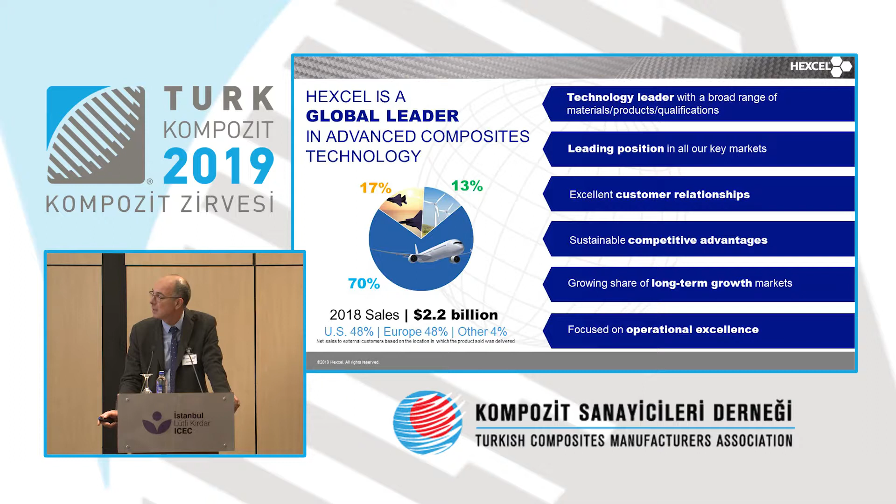So the first 3 slides will be a very short introduction to Hexcel. Hexcel is a global leader in advanced composite technology for commercial aerospace, defense and space and industrial application. As you can see on the slide, this represents 70% in the case of commercial aerospace, 17% for the military defense, and 13% in the case of industrial.

So today, what we are offering to the industry is the fact that we are really integrated. We offer a solution at all stages of the composite chain, from carbon fiber to fiber and fabrics, glass, carbon, aramid, to resin formulation for thermosetting and soon thermoplastic prepregs, laminates and pultruded elements. Molding material, composite tooling, honeycomb and adhesives are also in complement to our range, and we're also making it. So we are really a unique solution provider for that part of the industry.

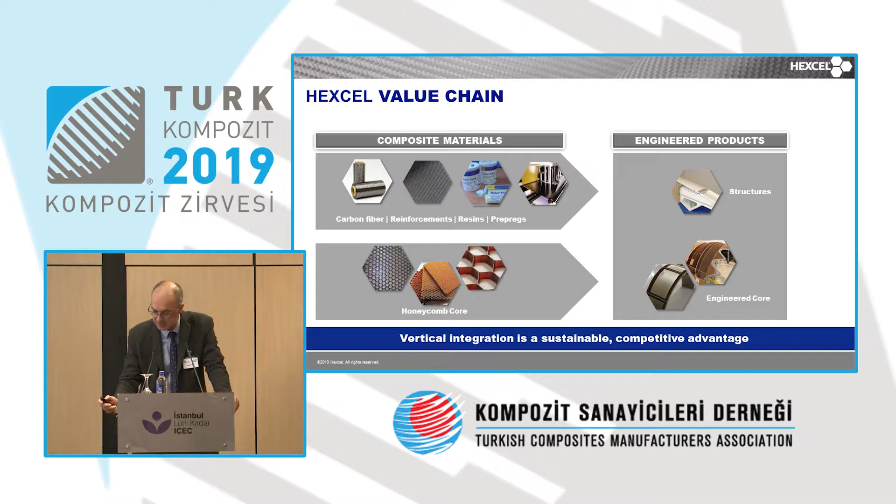We also produce structural parts, as can be seen here, which we call engineered core, particularly for aerospace. The industrial business focuses on 3 main areas. First of all, wind energy. The second is automotive. And the third one being what we call other specialty area, with 2 main focus today on sports and leisure and marine applications.

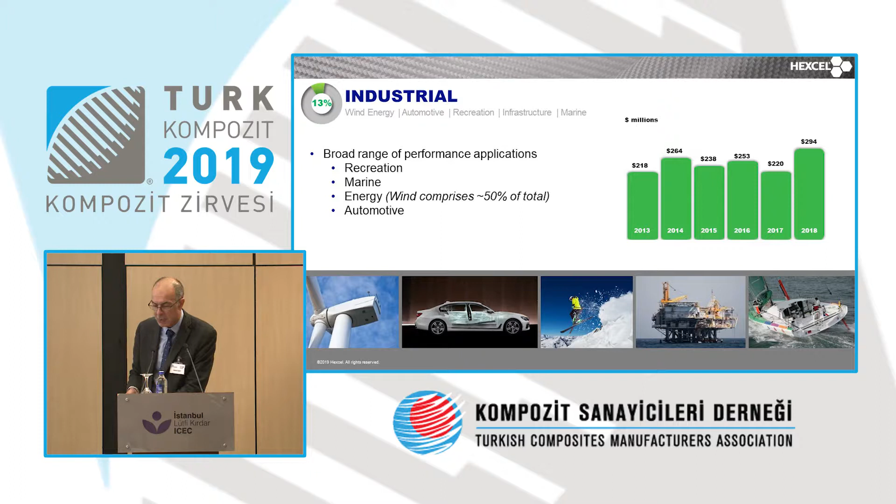As we can see, there is a big trend in the industry, of course, for lightweighting. And in the case of wind blades becoming bigger and bigger, this is also the case. Car designers are also looking at driving down the CO2 emission. So really lightweighting is a priority, and we are really pushing our engineers to develop more and more of these lightweight products.

If we look first into, I would say, the primary block for the carbon fiber composite, this is really what we call in our range the HexTow carbon fibers. And here is summarized the entire range of our products. We are one of the only companies to be integrated also in the monomer and the polyacrylonitrile precursor made both in the USA and also in France, close to Lyon, most recently.

Here, of particular interest, there are, I would say, 3 families: high strength, intermediate modulus, and high modulus. The high strength, the most used in the industrial world would be the AS4C, which is a fiber available in 3, 6, and 12K for sports and leisure, but also very much recognized for OEMs in carbon look parts in the automotive applications. The IM2C is also becoming more and more recognized in sports and leisure, and particularly for racing boats, as it is today the highest intermediate modulus fiber approved for IMOCA and America's Cup racing boats. You can build foils, structural parts out of it, and all the parts that are going into this kind of beautiful boats.

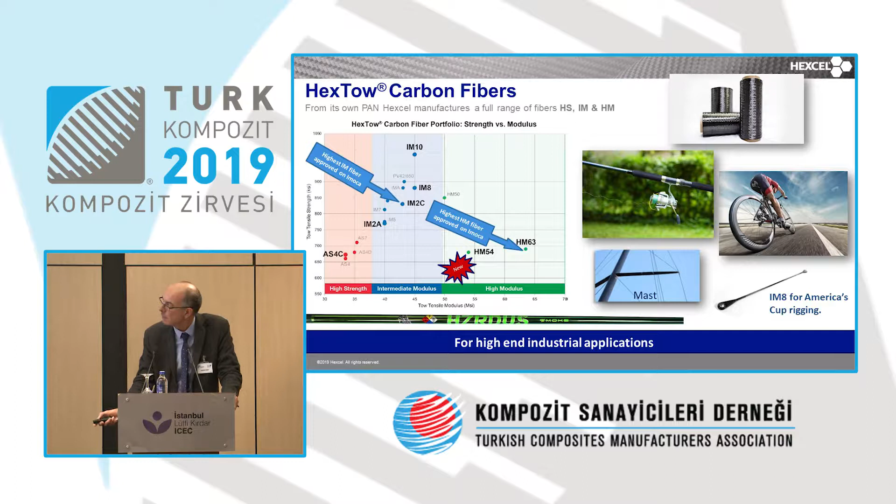Let's go now into the first family of reinforcement that we are proposing to the composite industry, which is the multi-axial product family called HiMax. Multi-axial are also known as non-crimp fabric because they are layers of unidirectional fiber that are assembled and stitched together in the following pattern, as you can see on the bottom here. And of course, they will provide strength and stiffness in multiple directions, something that normally your woven fabrics will not do the same way, particularly in the 45 direction.

Depending, of course, on the orientation of the fiber, you can really take the stresses in different directions. We've got unidirectional, biaxials, triaxial, and quadriaxials, and really going into marine infrastructure and automotive applications. The interesting thing about the non-crimp concept is that it is giving in-plane mechanical properties. There is less material waste and the layup time is reduced, of course, when you use thicker and thicker material, like in the case of building up really big structures. One interesting thing as well, we offer different compatibility depending on the resin that is used, epoxy, vinyl ester, or polyester, or in certain cases even multi-compatibility.

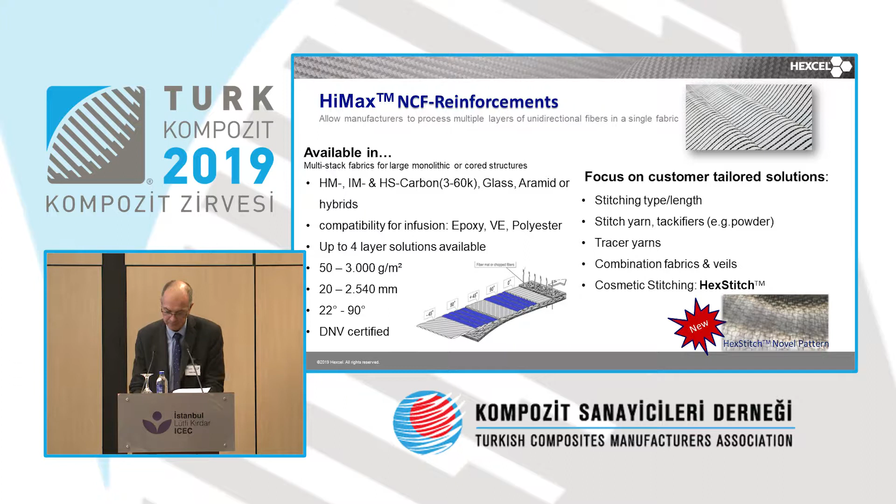It is quite interesting as well with multi-axial to offer a multiple way of tailored proposition. For example, we've got a micro mesh that will help the infusion control. This is a thermoplastic mesh that is assembled with the NCF. Another way to enhance infusion is to use what we call weft insertion into our UD fabrics. And this is what we call UDWI HiMax infusion fabrics.

And last but not least, this is something that can appear in certain cases when you are using those fabrics: the fabric will appear and we will call it print through. And in order to avoid that, we've got a solution by offering some layers of fabric that will avoid the print through during the infusion process. This is also quite important in certain parts of the industry.

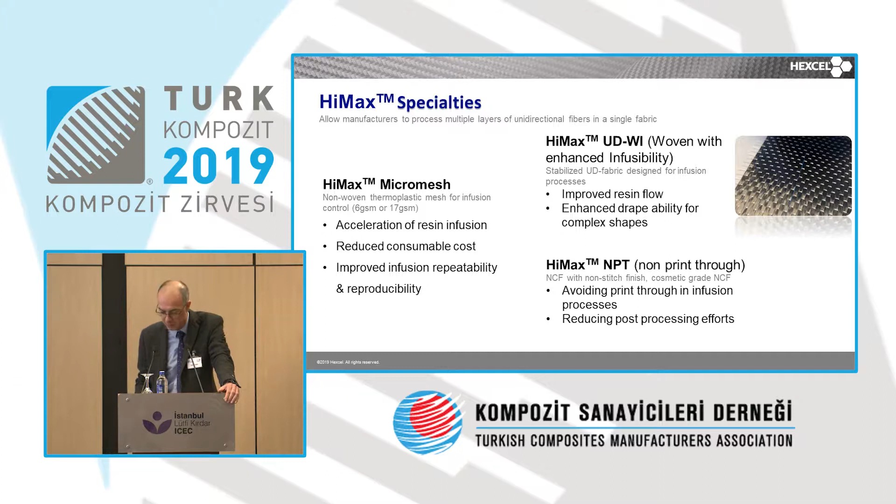Another featured and quite specific option that we are offering is a very heavy trend today, which is something we're presenting on our booth. It's what we call the dot pattern adhesive material, which is effectively a pre-tacked NCF, which is pre-tacked with some bonding material in order to help molding and

applying to the mold. Of course, one of the main advantages is that it does not need any tackifier, no spray, and it can be applied directly onto the mold.

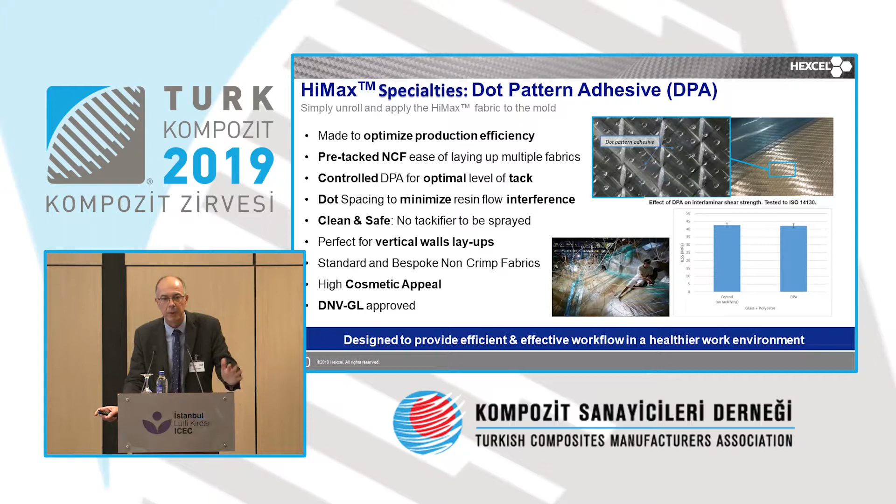So we've got two versions of it, depending on the weight of the fabric. If the fabric is going to be more on the carbon or weight below 600 grams, 700 grams, it will be 3 grams bonding, and then we can vary and go up to 8 grams bonding. That will also help for heavier fabric.

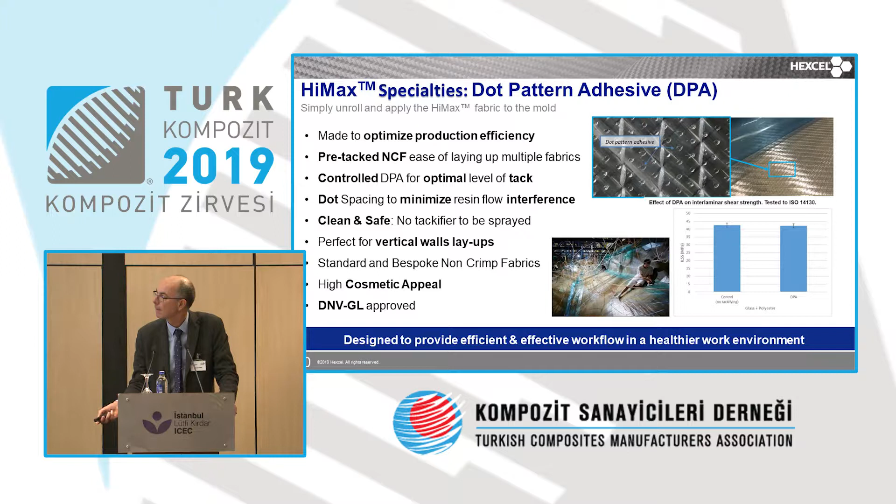So we've developed some of this technology with some of our customers, and particularly here, the company Sunseeker, who has developed that for one of their latest boats, the Predator 50, that is represented here.

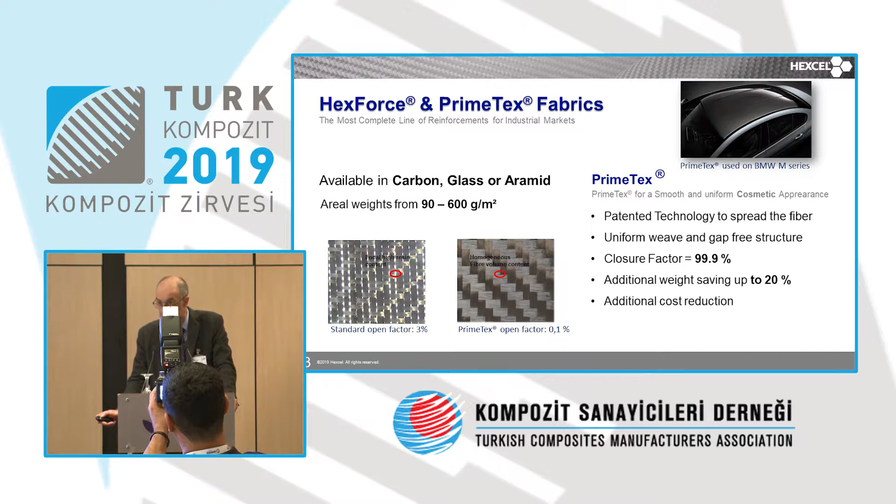If we go to the next part of the product, this is also reinforcement. This is more a traditional way of weaving. Of course, this is warp and weft type of fabrics. And today, we are one of the leaders in woven reinforcement for composites, particularly our carbon fabric plant in France is considered one of the biggest in terms of capacity.

Here we have a full range of fabric. I will not go into those details. We of course propose all the main plain weave, twill weave, and satin weave. But one thing I will just stop on for a few minutes is the Primetex range of fabrics. In that particular case, we have closed weave and uniform cosmetic appearance.

The filaments of each tow are spread out, so that it can actually reach a closure factor of close to 100%. An interesting thing about that technology is that it enables to go lower in weight, down to, for example, 98 grams for a 3K, where normally you would be using 1K material. So that's really something that enables good cosmetic appearance, but also cost saving and weight reduction.

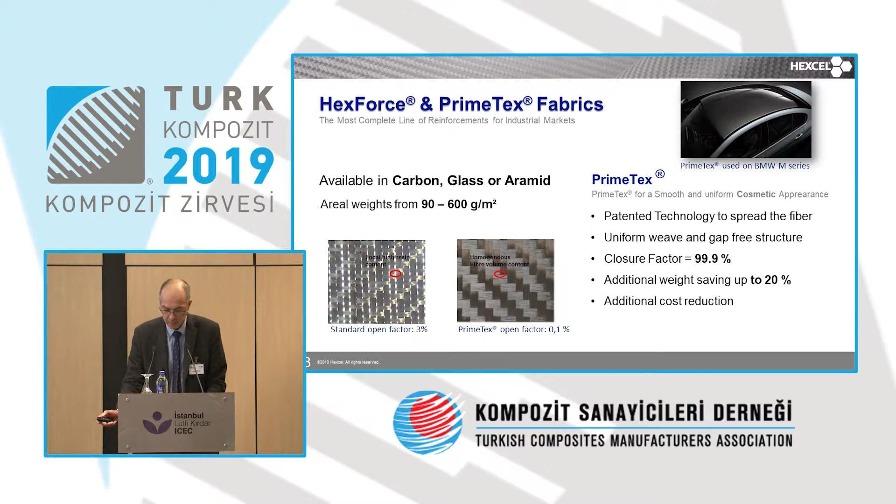Something also that we are introducing to the industrial companies only recently, because that material was originally developed and designed to meet the requirements of the aircraft industry structures by cost-effective out-of-autoclave technology, such as vacuum infusion or injection. Now we're promoting it for selected applications in industrial as well.

The HiTape is actually a dry, high-performance UD tape made from a whole number of carbon tows, which could be high strength, intermediate modulus, or high modulus, and stabilized by two thermoplastic veils on both sides of the tape. There is no cutting during production. The edges of the HiTape are completely clean and free of any fuzz.

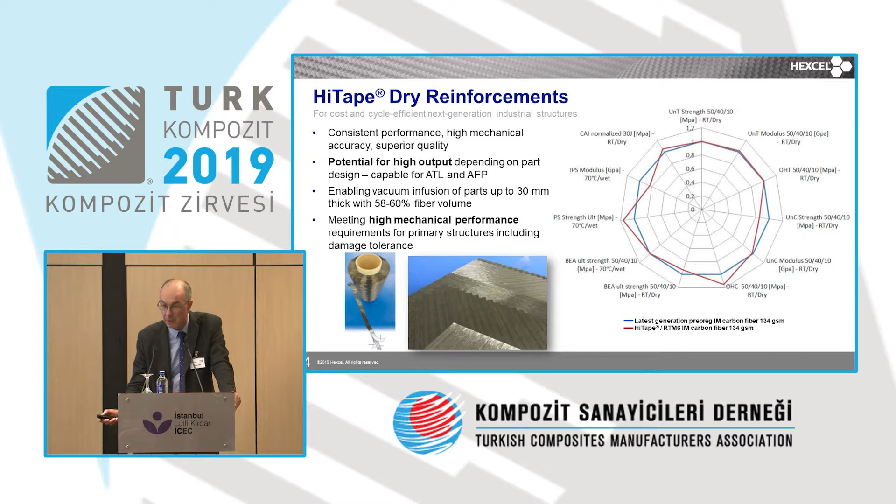This can be used with RTM resin, with best results obtained with our Hexcel RTM6, but the interesting thing there is that it is of course fully suitable for industrial fiber placement systems. So that gives really a different view on the way of applying those types of fabric. No need to cut, it's already at the right dimension.

A look at our adhesives, which some of you might have known in the past was called Redux, which is now called HexBond. Basically, three families that are being used in the case of industrial. We've got film adhesives, which are most of them epoxy-based, but we do have also BMI adhesive that supply in film forms on a roll and will be requiring heat and pressure to be cured.

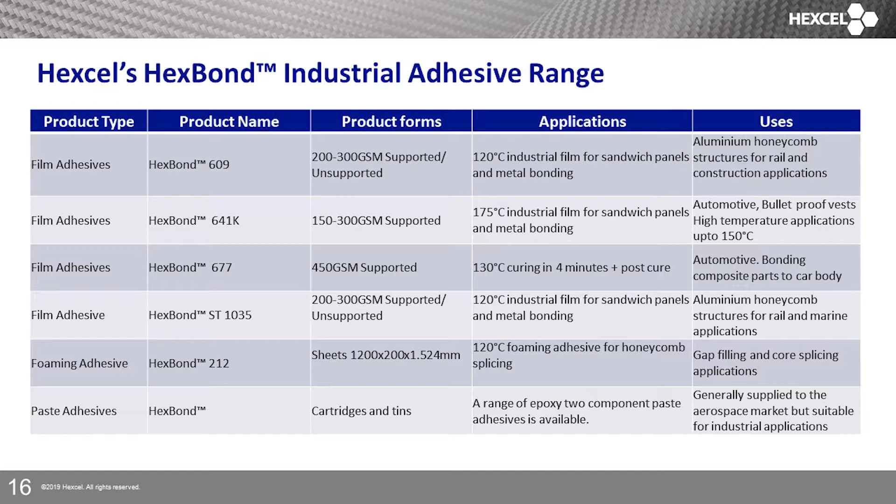So they are ideal for metal-to-metal bonding, composite bonding, and that's also something being used for the manufacture of honeycomb sandwich structure. We have also a family of foaming adhesive films. So these films will expand when cured at an elevated temperature, making them really ideal for gap filling in certain structures.

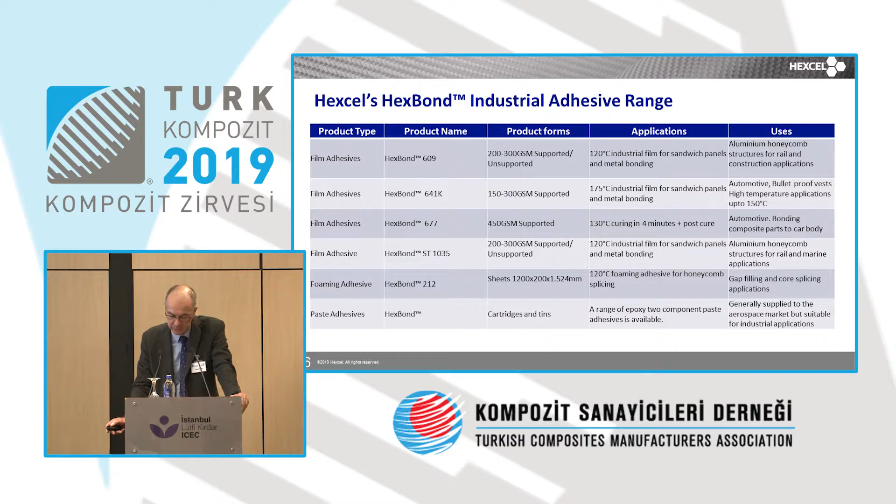And finally, the last family that is actually used in the industrial would be paste adhesive, which are either one or two components epoxy or BMI adhesive, which can be used for bonding, potting, and filling composites and metallic structures. So we've supplied them in different type of packages, cartridges, or small container.

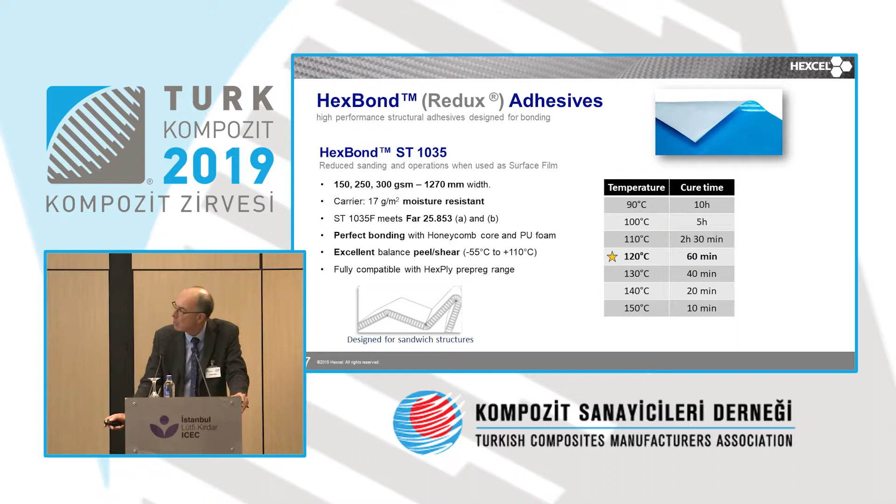The next two slides is to illustrate the sort of applications that we have. This will be in marine, also in the case of rail construction, to bond the sandwich panel that would be in those applications.

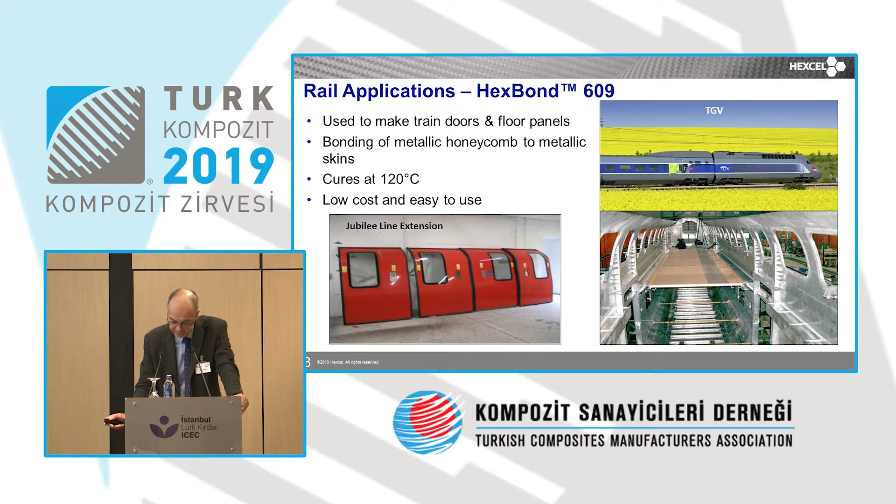Finally, but not the least, we'll have a close look at the comprehensive range of prepregs material that Hexcel is offering. So as you all know, prepreg is the ultimate composite material. It is really prepared industrially. It cures at elevated temperature, but not only, as you will see. There are some now prepregs curing at lower temperature. And this will really transform the structure in a highly durable, temperature-resistant, and exceptionally stiff material.

So we provide a number of prepregs for industrial applications, epoxy, phenolic, BMI resin matrix system. They are reinforced with woven, multi-axial, UD carbon, aramid, or glass fibers. And depending on the application, you will find what you need at the end of the day. So some of them would be more for low temperature cure, M34, M79, good fatigue performance, M901, M34 will be flame retardant, fire, smoke, and toxicity performance, and also some great visual appearance, cosmetic appearance, like in the case of

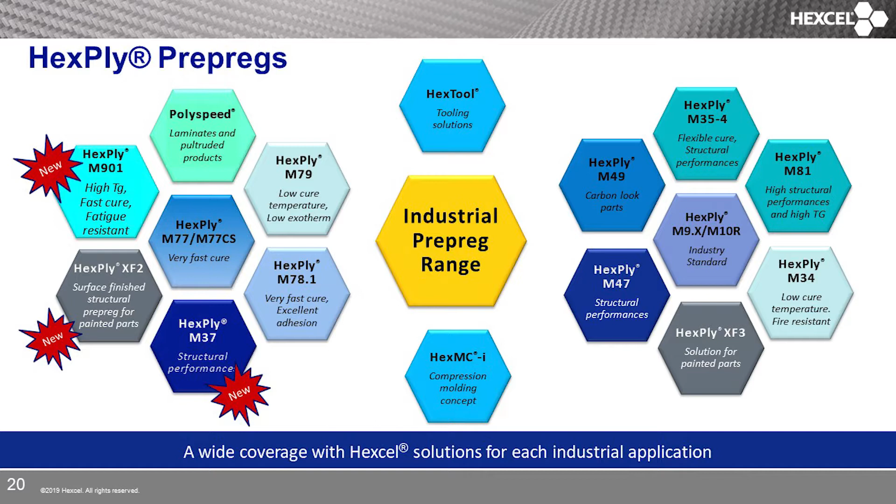M49. So basically, on the right side of the slide is our historical range of products that are still very much utilized by many customers for the excellent properties. You can also see our two different concepts. One, the HexMC, is the sheet molding compound concept, which we have some parts exhibited on the ACES booth where we are present. And also another concept is the HexTool tooling solution, which is based on the HexMC as well, and in replacement of very high-level tooling solution like Invar, for example.

On the left side is more of the recent prepregs and the latest innovation. And finally, just to make a note, the Polyspeed range is more of a laminate, also presented on our booth, where these are cure state materials and epoxy resin, most of them, used in sports and leisure and also medical and media.

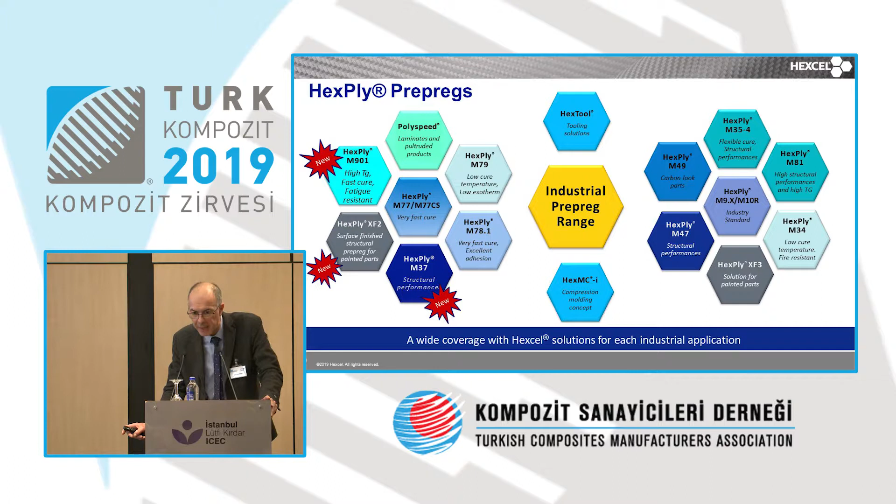I will focus on three of the latest innovation, which first of all is the M37. The M37 has a cure temperature between 90 and 160 degrees Celsius. TG of 130, 140. The toughness is quite interesting. The shelf life is superior to 4 weeks. And the hot and wet performance give them a good candidate for being used as well into various applications and also in marine applications. But it's also today considered for automotive structural parts.

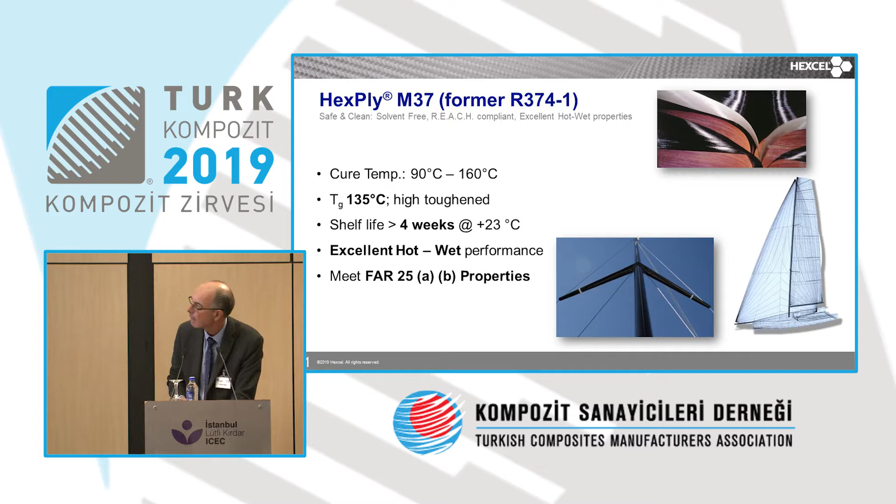The next one is the M901. The M901 is really fast curing material, fatigue resistance, and high service temperature system. This really makes it suitable for pressure curing, autoclave, out of autoclave, with cure temperature between 120 and 180. So as you can see, what it makes also different is the fact that the high TG is superior to 190 degrees Celsius, doesn't make it so sensitive to the fact of leaving it at room temperature. It has a 15 weeks proven outlife at room temperature, which really makes it quite interesting if you don't necessarily have all the freezer activity.

So we're talking room temperature, of course, so it's always some things to be discussed in terms of what is the room temperature. The good fatigue performance makes it extremely interesting for leaf springs. In the case of automotive, we've got quite a nice number of programs ongoing to replace steel with composite material. In that case, it will be reinforced with glass UD.

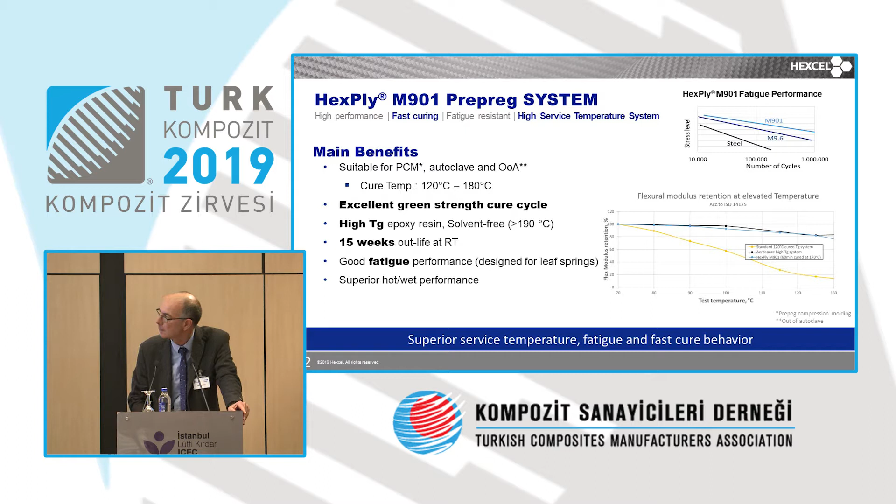Some of you may remember the M79, as this prepreg was the main focus of my presentation here 2 years ago. It is now fully industrialized and commercially proven with its unique properties. Really what makes it unique is the low temperature cure starting around 80 degrees Celsius, long outlife as well in that case, and a very low exotherm system. And I'm presenting it today because it's the base of our XF2 surface finish structural prepreg.

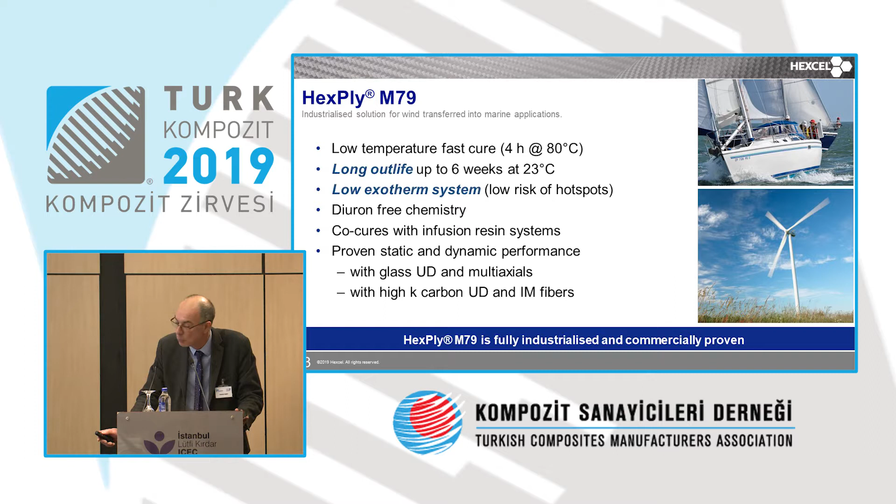The fact that it is a very low exotherm material enables thick sections to be cured at moderate temperature. As you can see here, it's nothing realistic, but we did an experiment with nearly 700 plies of this material that were made to make a cube, which is quite heavy. What is also important in that technology is the fact that you can use what we call an airvent grid layer, and this will really help easy processing and the fact of having all the air going out, getting very low porosity level, and despite the thickness, really no need for systematic compacting.

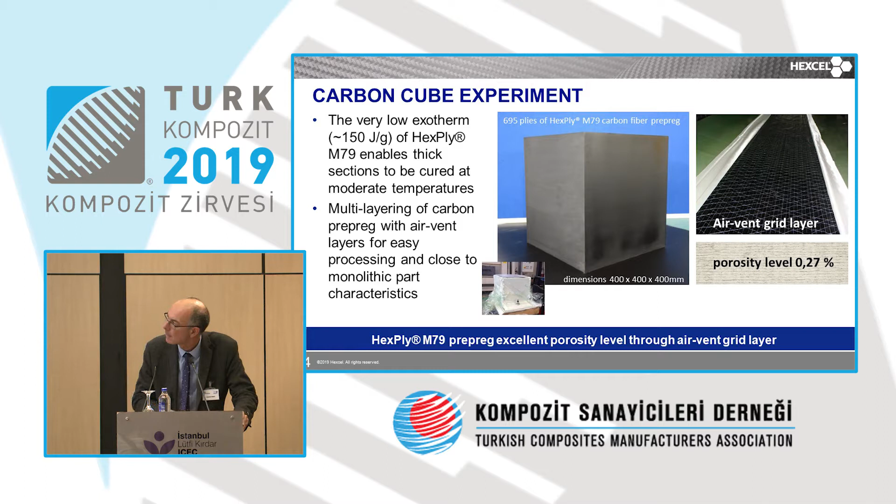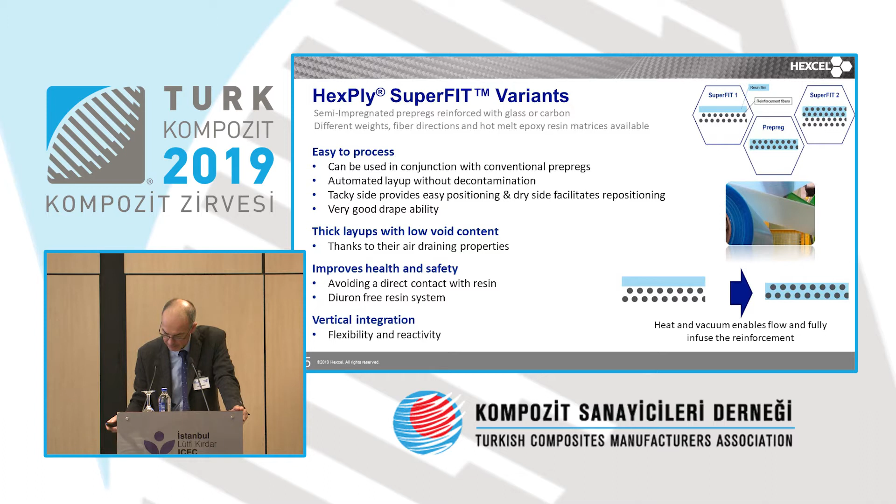Now, the XF2 technology was designed to offer an optimized surface finishing layer for in-mold composite components. So it's a one-stop, one-layer material that provides immediately a paint-ready surface finish with the structural layer already integrated, without the need for a gel or a process coat afterwards. So I really encourage you to stop by our booth to see the part that was made in order to demonstrate the quality of the material when it comes out of the mold. And you will see no pinholes. It really has a great surface that just needs to be painted, and no gel coat needed. It is fully based on the M79 system. So it's a single layer solution, which makes it quite unique today in the proposal for the market.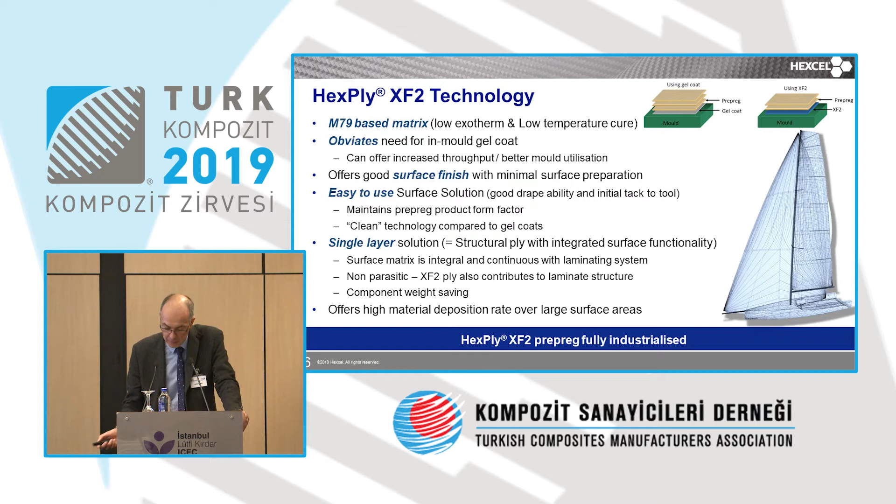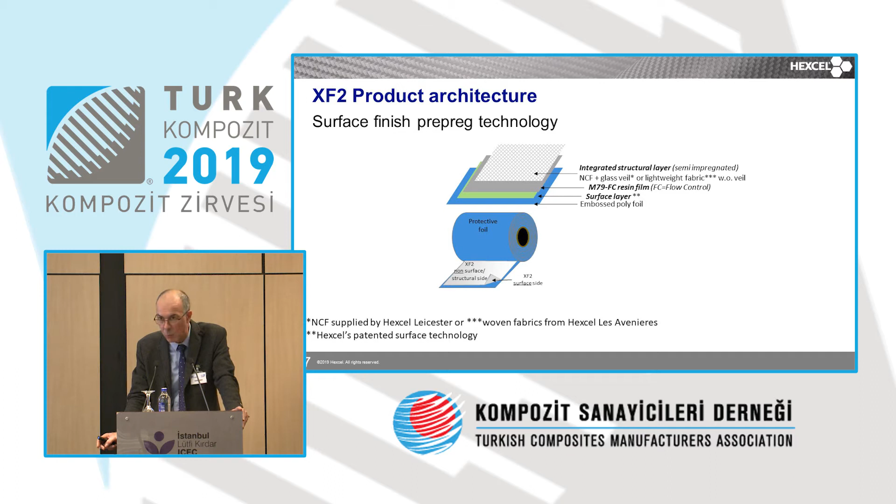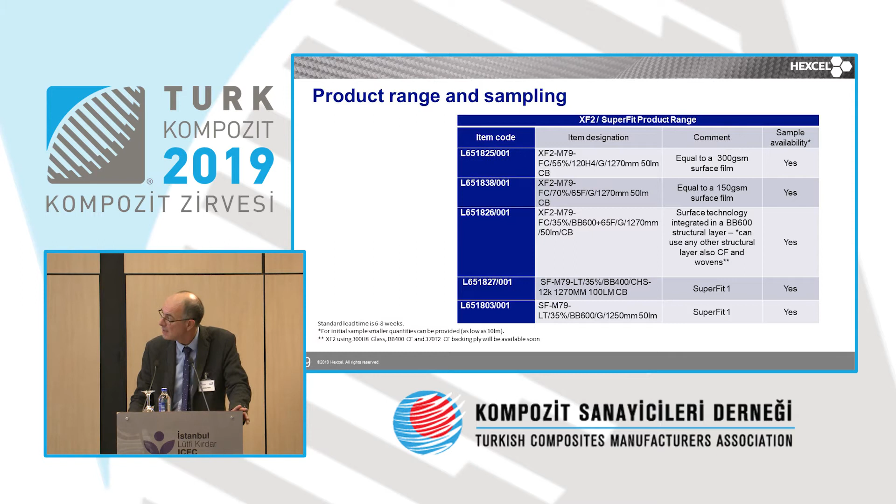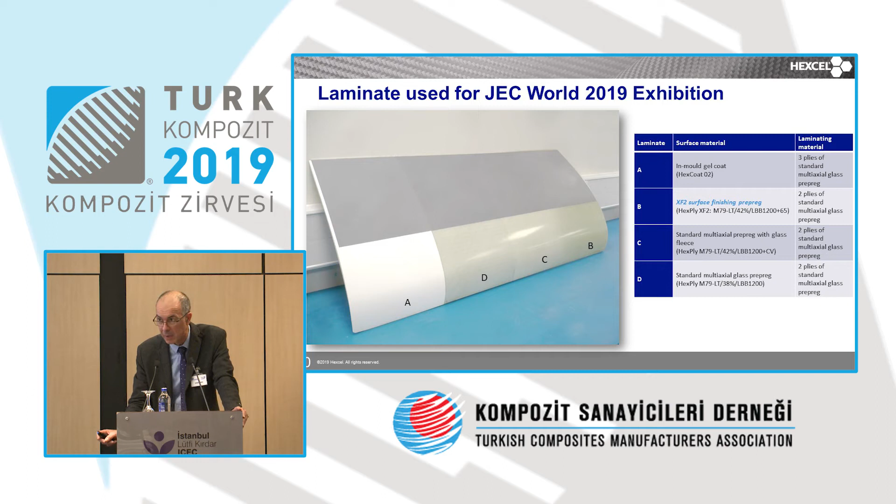So even if it is quite a new technology, we have prepared some samples that are already available, and one of particular interest is the one which is combining both the surface, the structural layer, and also a Biax 600 grams glass that is really making it a unique and one-step product. We presented some parts there to illustrate the difference between the current technology and the one using a gel coat. And as you'll see, there is no real difference at the end of the day. The aspects are very, very comparable. The interest there is that because there are not that many steps, you end up saving up to 30 or 40% takt time in the overall process, which can make a big difference when you're making many hulls.

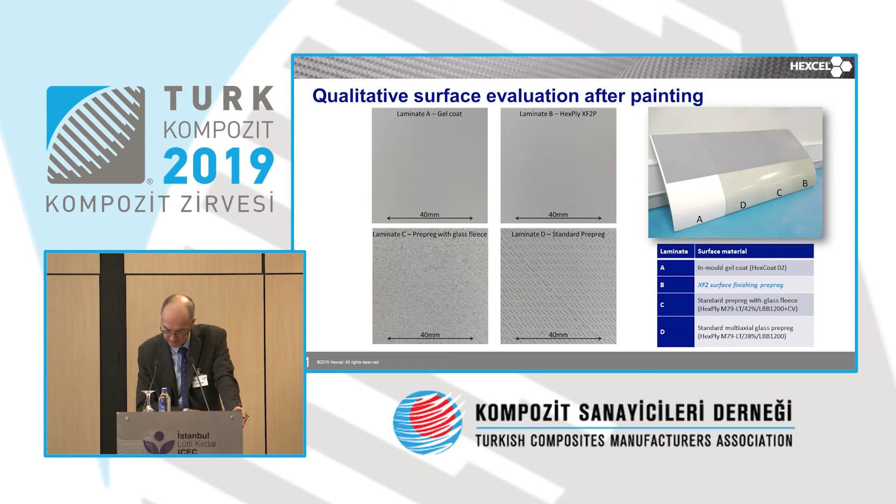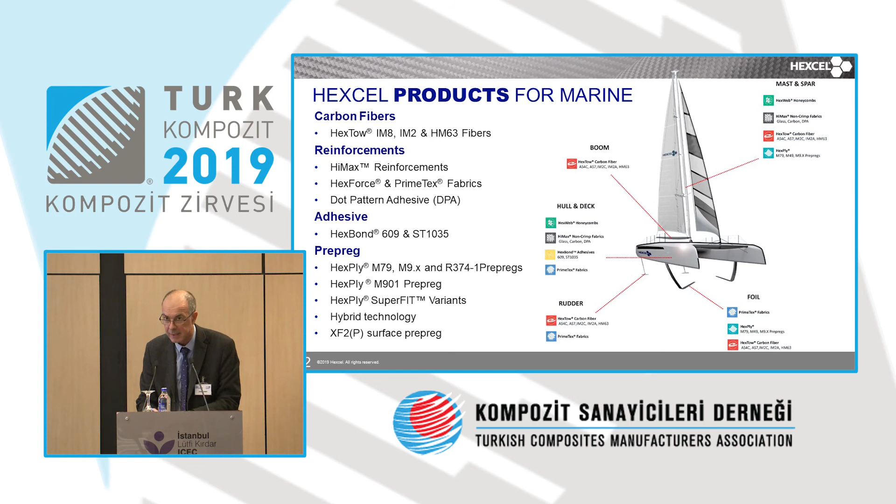So as a conclusion on the marine side, Hexcel's products are used everywhere in marine applications, including top-of-the-range racing boats, super yachts, luxury catamarans, high-performance military vessels, and more electric ferries, because that's really becoming a trend as well to have this kind of material in there. In the past 40 years, Hexcel has developed a wide range of composite materials, really to get into America's Cup, IMOCA, and Ultime catamarans. As you can see, we're starting to have quite a nice track record on these ones. Most of these boats have been going around the globe many times, it's the Formula One of the sea, and it really gives good information as well about the mechanical performances of those materials.